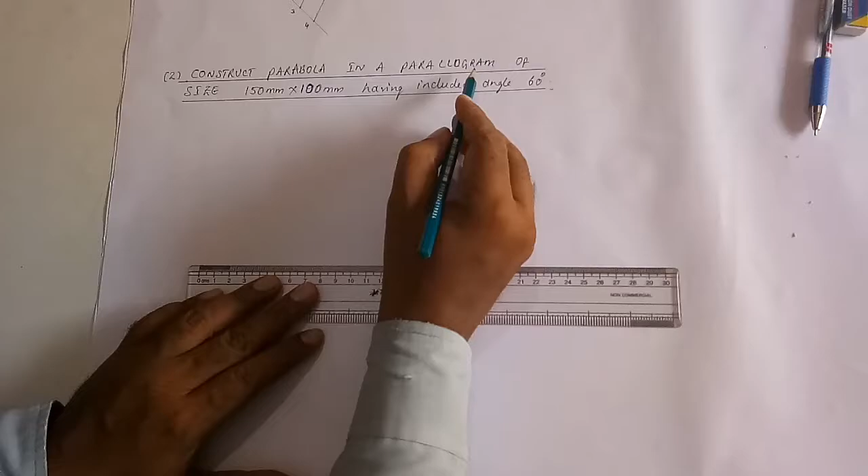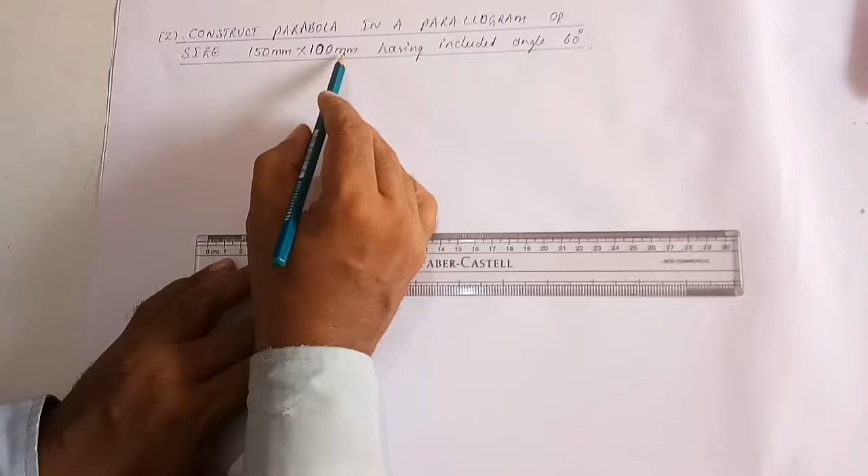First we will inscribe a parabola inside this parallelogram. Now how do you construct this parallelogram? What is the size given? 150 mm into 100 mm is the size of the parallelogram.

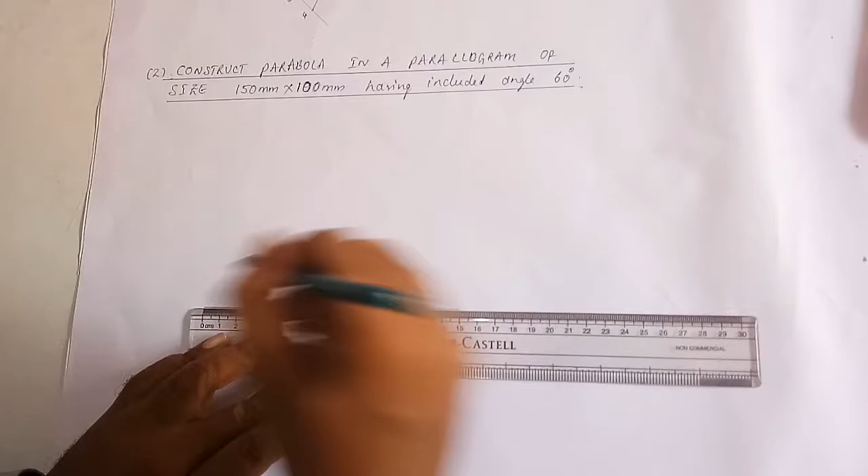First draw a line of length equal to 150 mm, that is 15 centimeters. Now how much is the included angle given? The included angle given is 60 degrees. So...

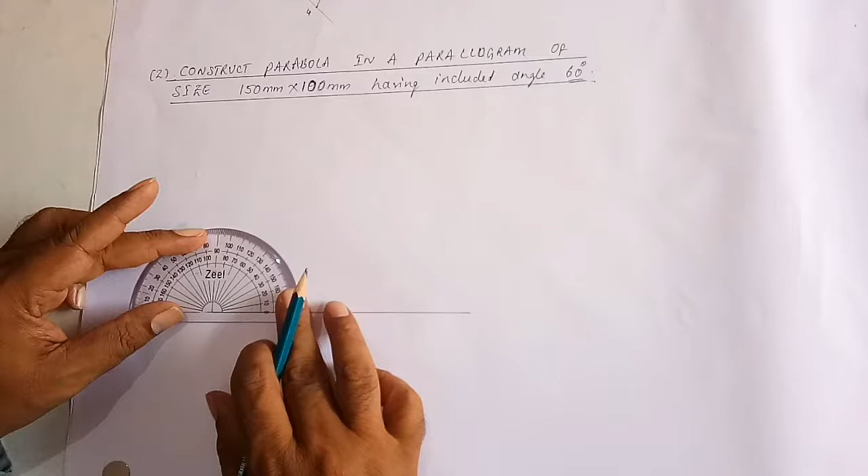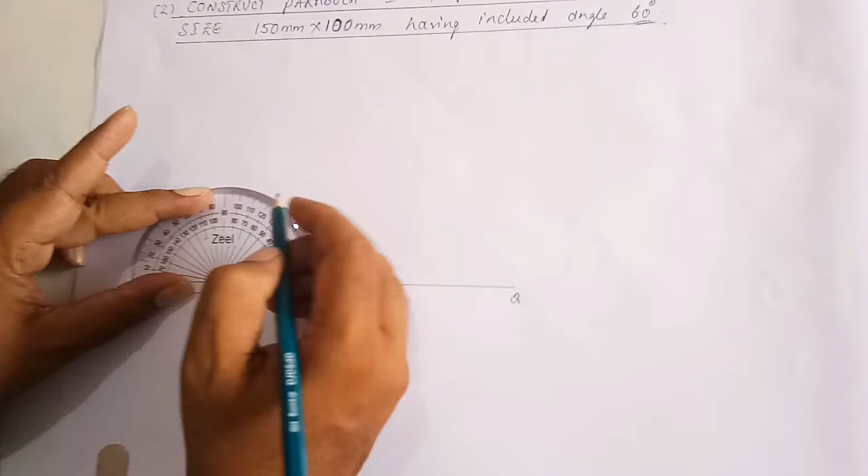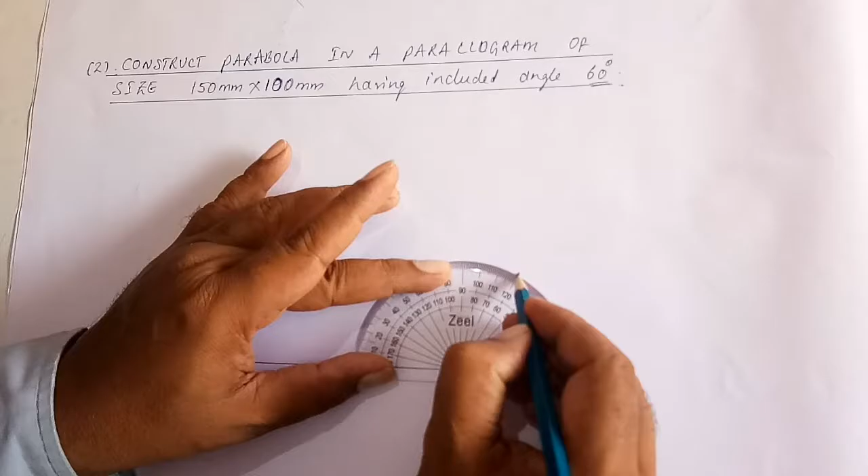Call this as PQ. At P, construct an angle of 60 degrees. Even at Q, construct an angle of 60 degrees. Your exterior angle is 60 degrees, your interior angle is 60 degrees. Now extend this line.

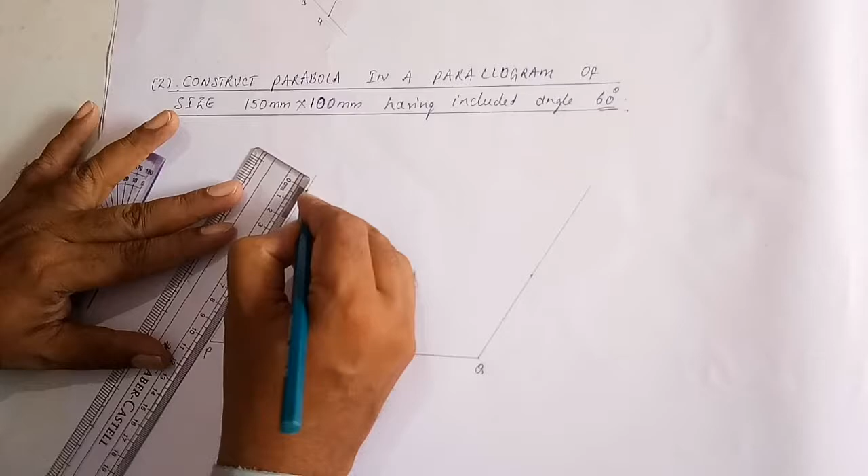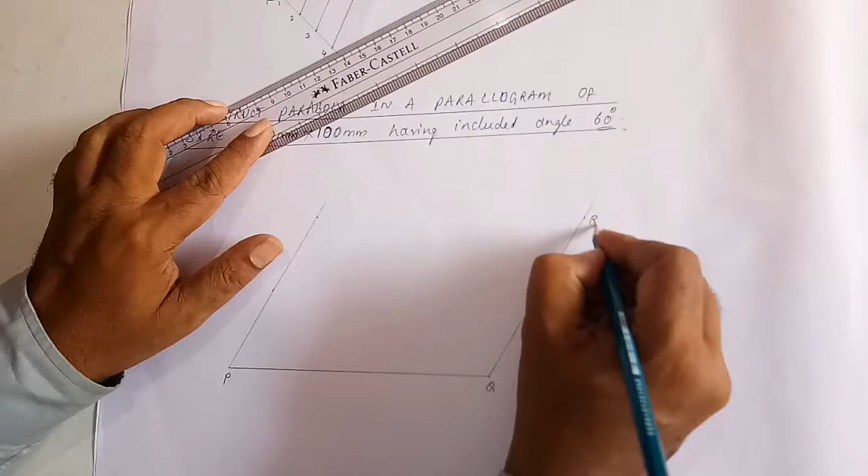Along this line, what is this other size? 100 mm. This is 150 mm, this side is 100 mm. Measure 100 mm, which is 10 centimeters. Here also measure 100 mm, which is 10 centimeters. Call this as R, call this as S.

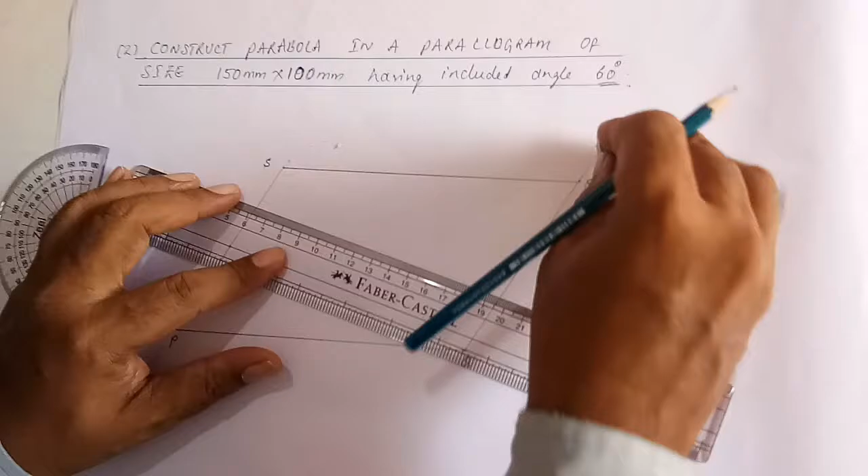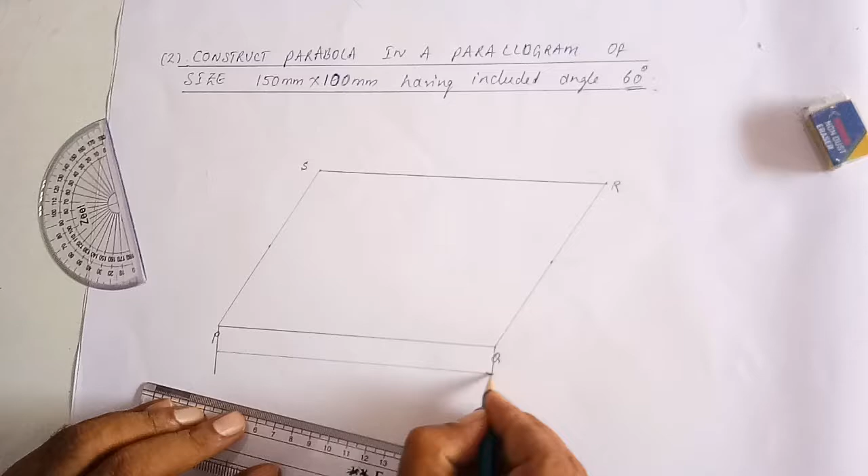Now we have a parallelogram PQRS. We have parallelogram PQRS having base 150 mm, base 150 mm, and side, the other side of the parallelogram.

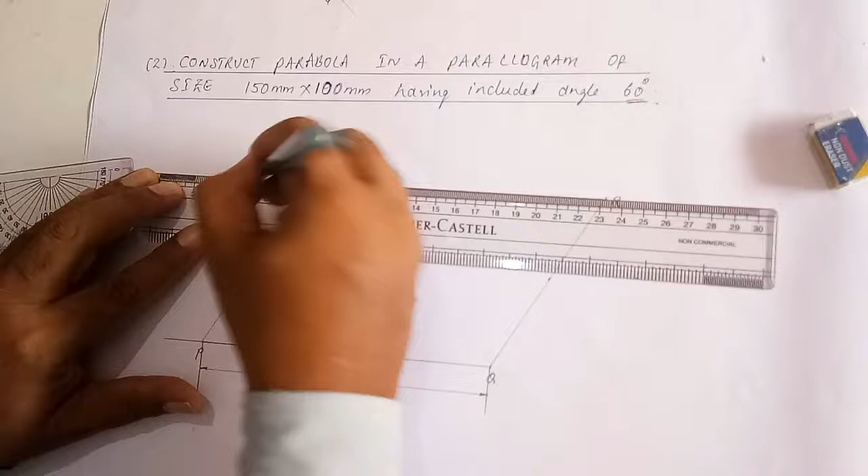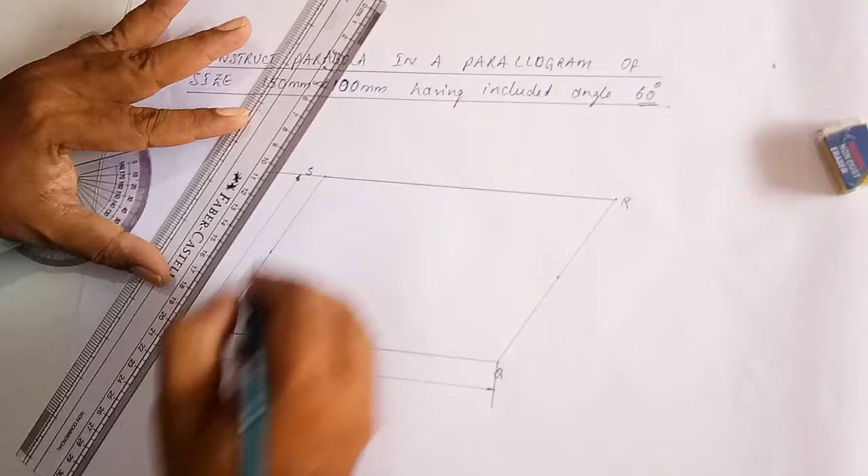You have to do the dimension like this. You have to draw the dimension line parallel to this line. This is 100 mm, this is 150 mm.

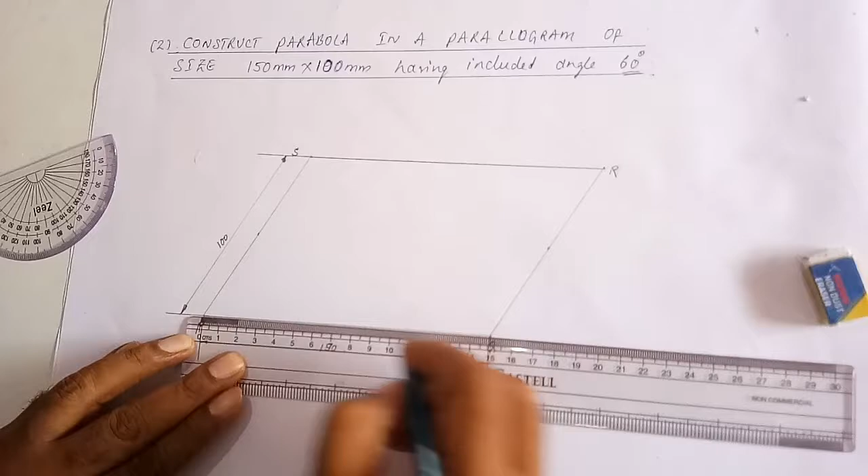Now, after completing this parallelogram, we have to inscribe a parabola inside. This is 150 mm. Divide this into two halves, 150 means 75 mm. Locate the center point at 75 mm and draw a line.

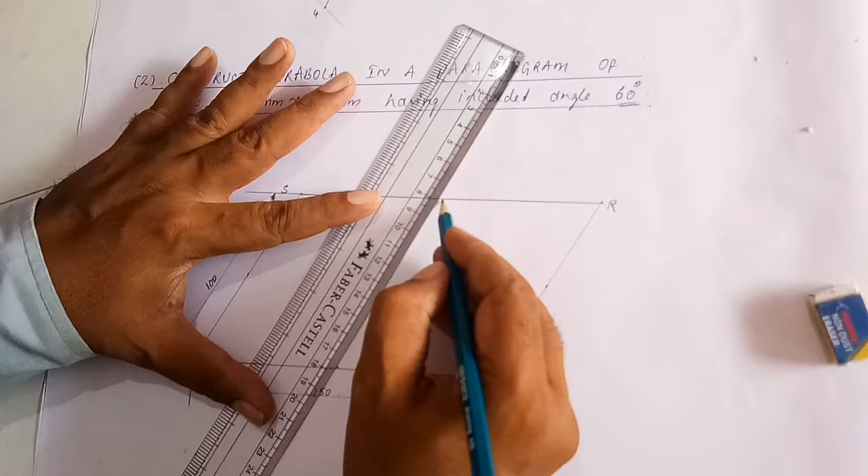Parallel to one of the sides, this is the axis of the parabola. This point we call it vertex V. This is O. OV is the axis of the parabola.

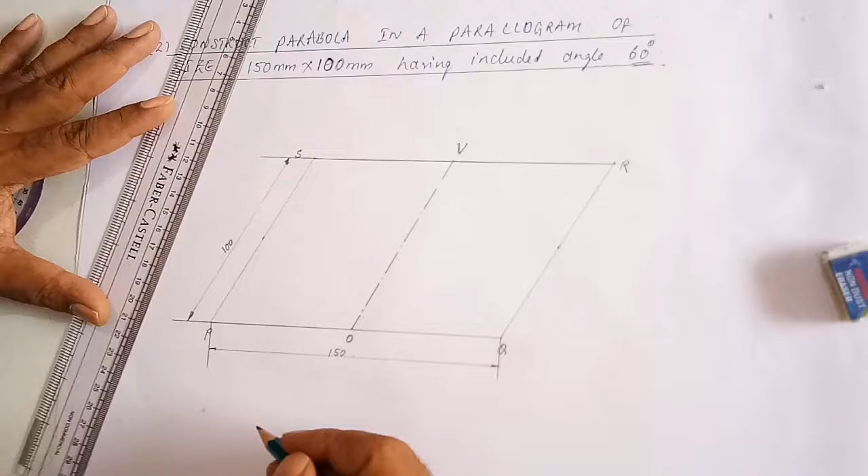Now we have parallelogram PQRS. This is a parallelogram. This is the center of this side and this is the vertex, OV center. Join this and this should be a chain line. You can see here, chain line.

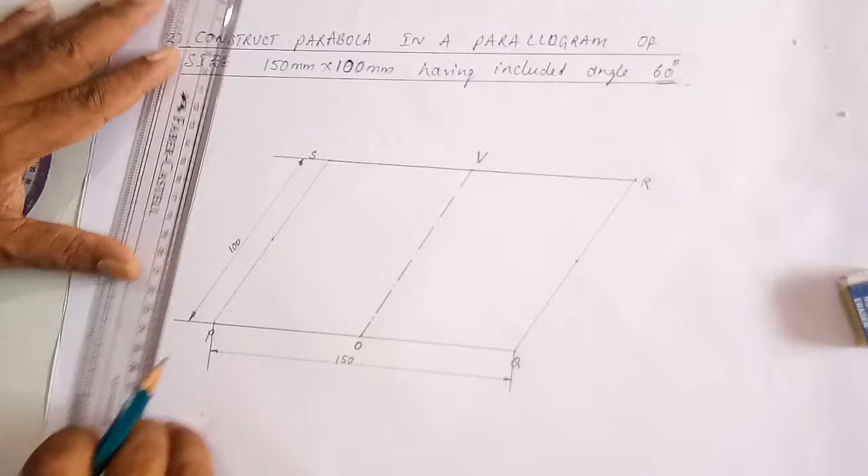After completing this, you can divide any one of the sides into 4 equal parts. Since it is 100 mm, I will adopt the normal method itself. You can do the previous method also. Yesterday what I taught, you can do that method, or else you can do this method also.

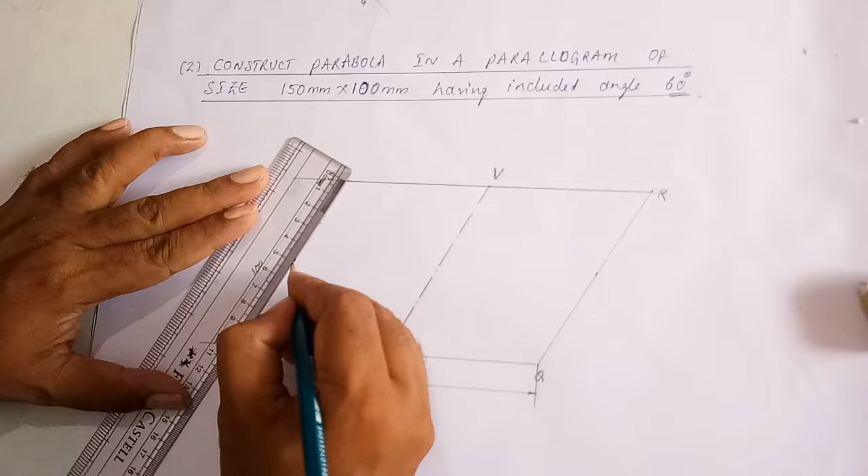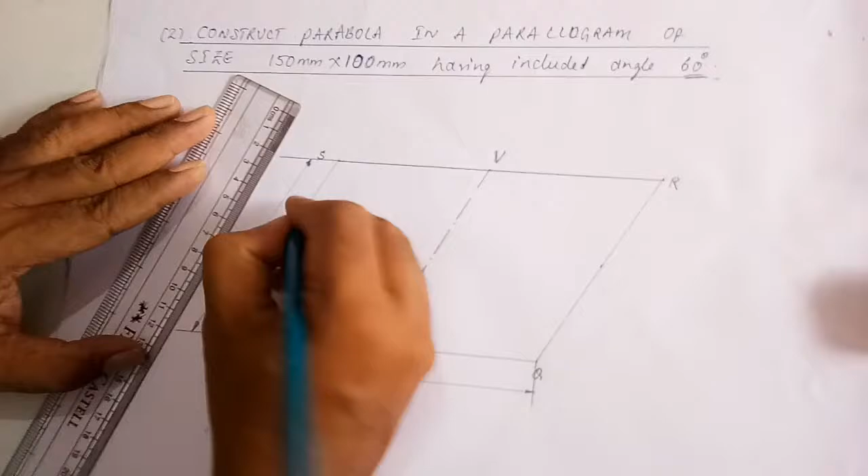4 parts, 100 mm, 4 parts means 25 mm, 25 mm you can take. 3 points like this. 4 parts are divided: 1, 2, 3, 4. Call this as 1, 2, 3. Similarly, this side also you divide into 4 parts.

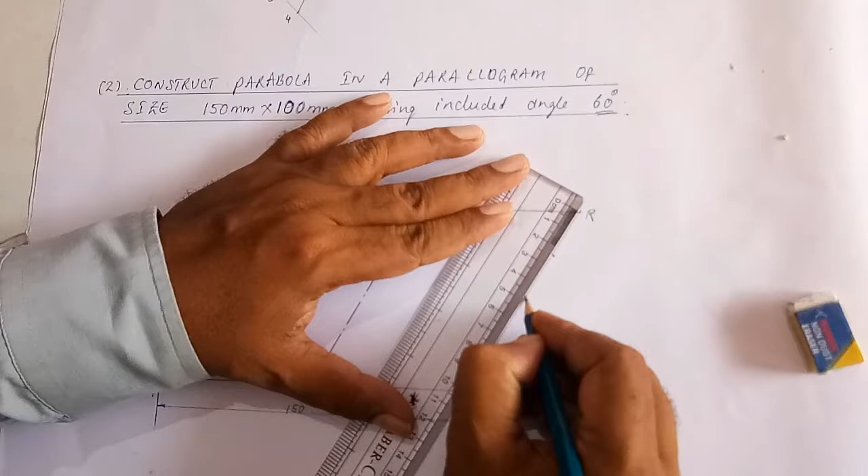How do you divide this into 4 parts? 25, 50, 75, 100. Call this also as 1, 2, 3. Now PO is 75 mm, you can't adopt the same method.

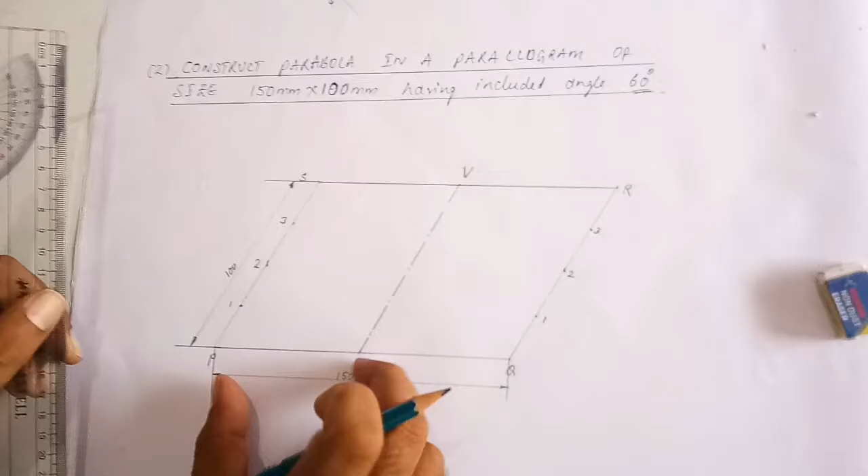Now divide this PO into 4 parts, OQ also into 4 parts. Now how to divide OP into 4 parts? Draw a line at any angle.

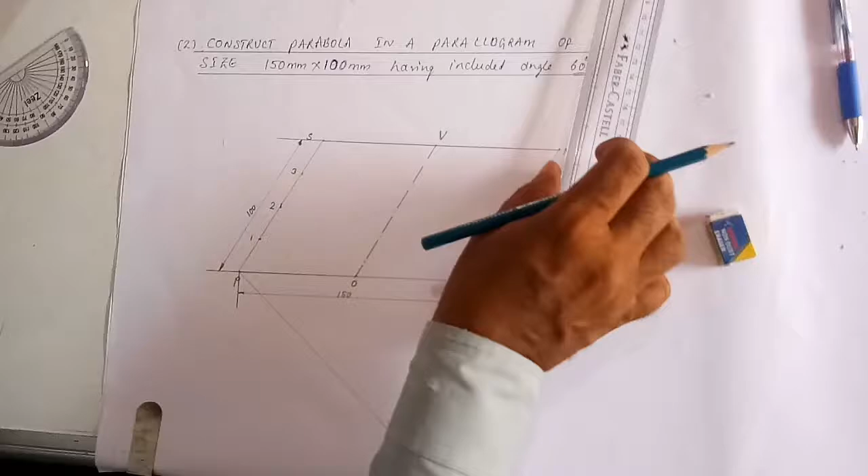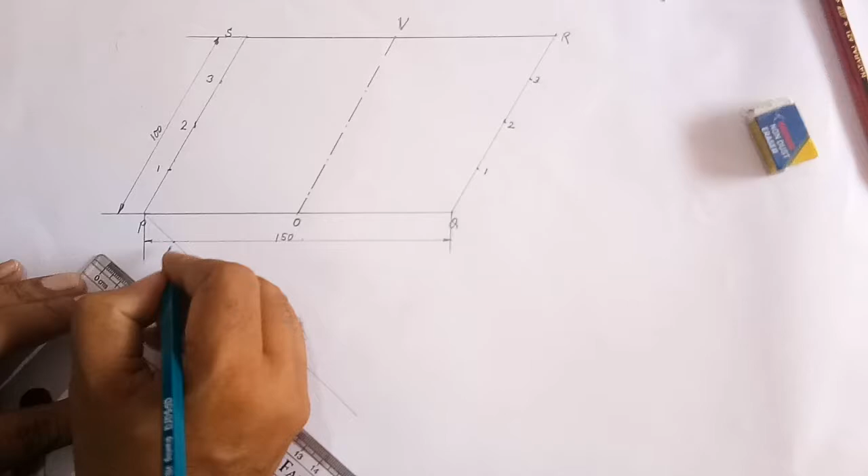And here you take 2 centimeters: 4, 6, 8. 2, 3, 4 parts have been taken. Call this as 1 dash,

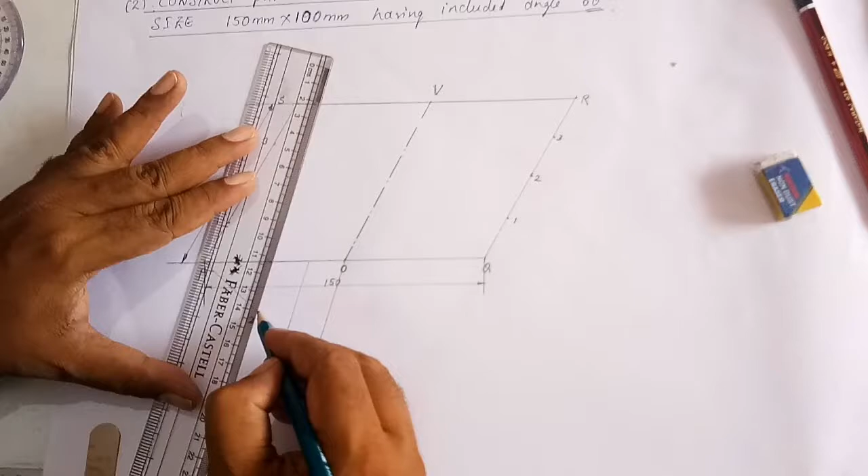2 dash, 3 dash and 4 dash. Join 4 dash O, and draw a line parallel to 4 dash O from 3, from 2 dash, from 3 dash, 2 dash, and also from 1 dash. Draw parallel lines like this and call these points as 1, 2, 3.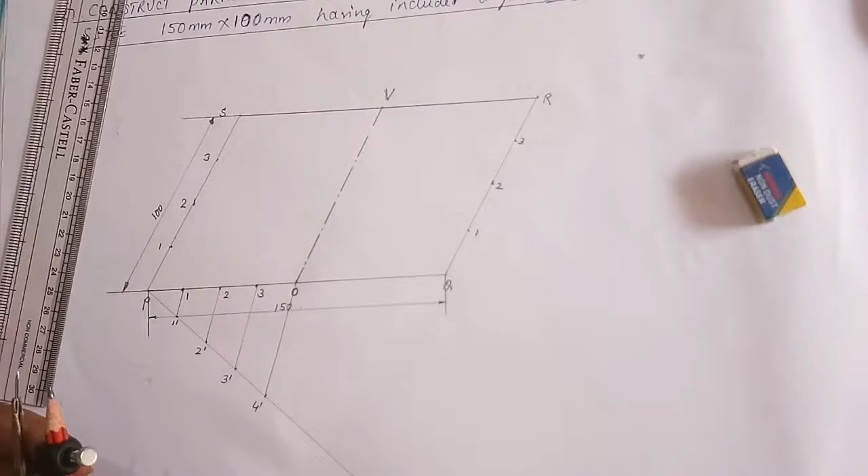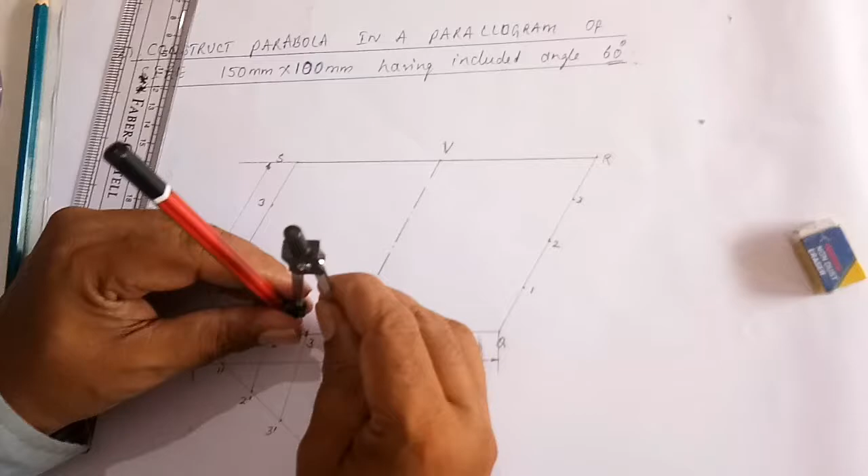Similarly, for this side, if you want to find this side, you can make use of your compass and transfer the points. Now already I have divided this into 4 parts. Same distance you can take here and then transfer those points here.

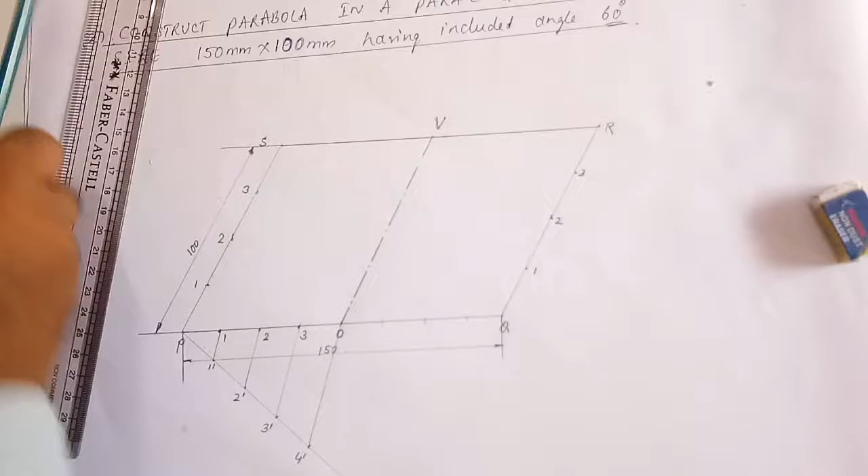4 parts, call this as 3, 2, 1. Now what I did, I have divided this side into 4 parts. I have divided this side into 4 parts, OP into 4 parts and OQ into 4 parts. Like this we have to divide this into 4 parts.

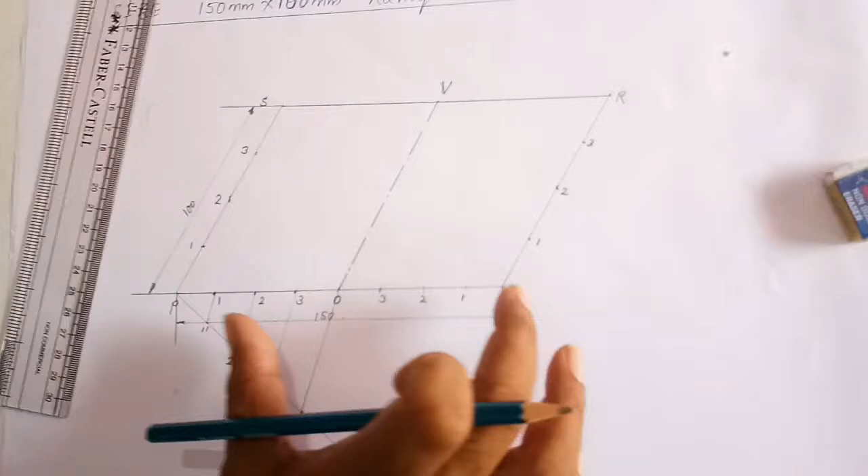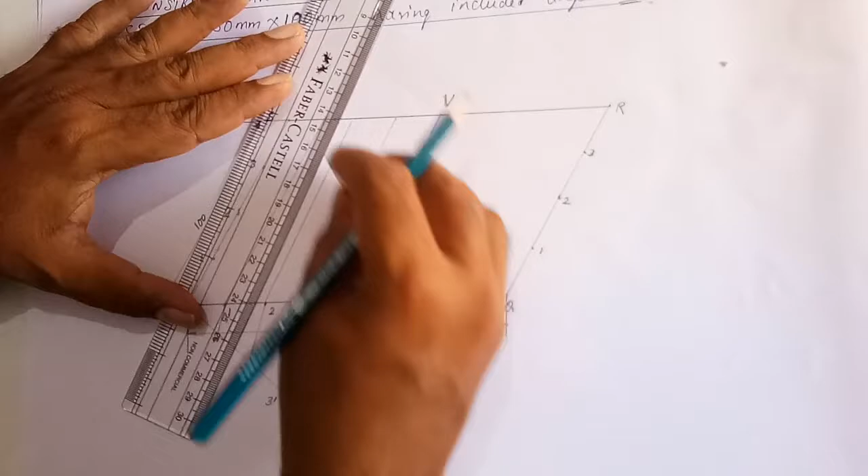Then draw a line parallel to this vertex line from 3, from 2, from 1. All these lines should be parallel to this vertex line. Like this you have to draw parallel lines. You can make use of a drafter for drawing parallel lines. Similarly, here also you can draw parallel lines.

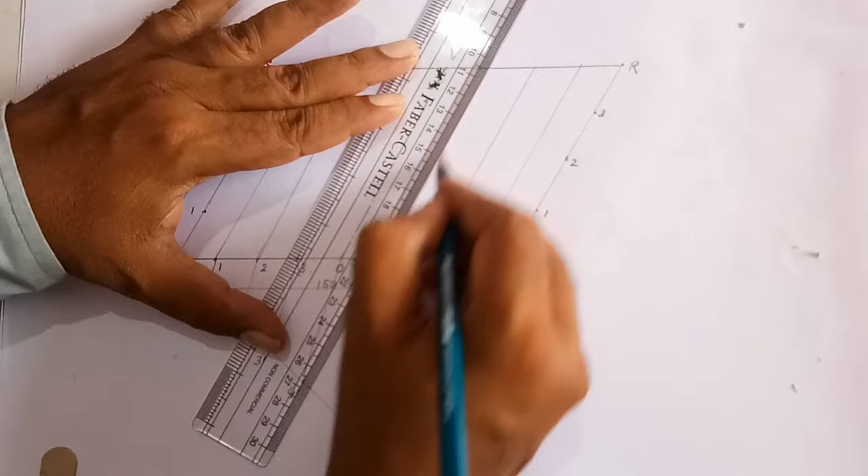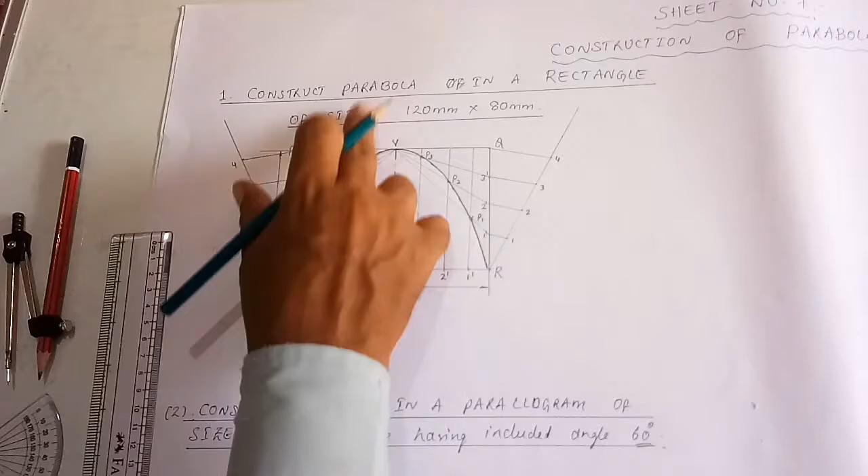So the only difference is this is the rectangular method. In the rectangular method what did we do? We drew vertical lines. In a rectangle, if you want to inscribe a parabola, we did vertical lines. Here in the case of a parallelogram, we are drawing parallel lines, like inclined lines. So for these 2 sides, we are drawing parallel lines. Understood?

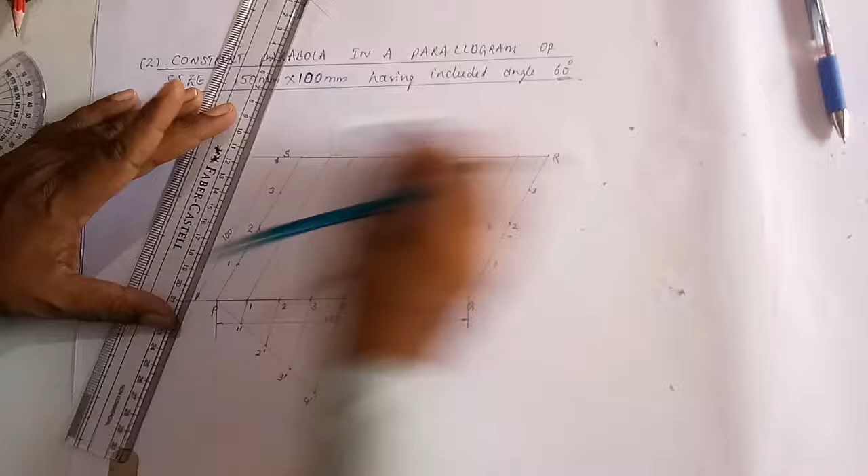So like this, you should draw the parallel lines. All these lines should be thin. Don't make this dark. Okay, all these lines should be thin.

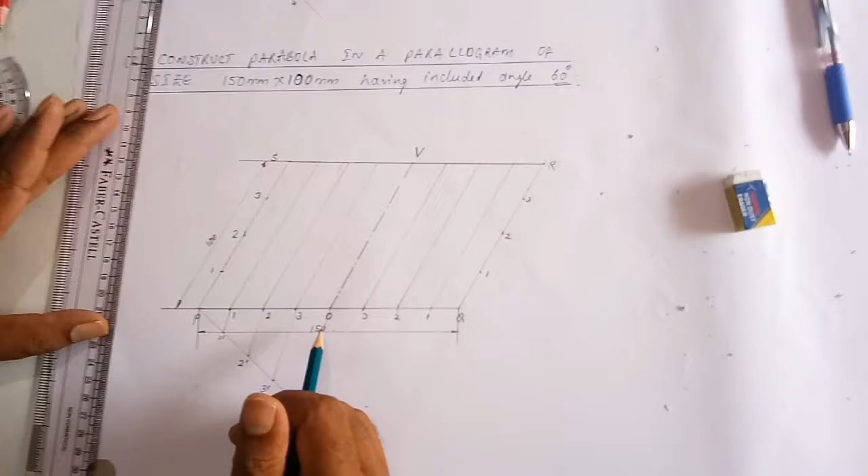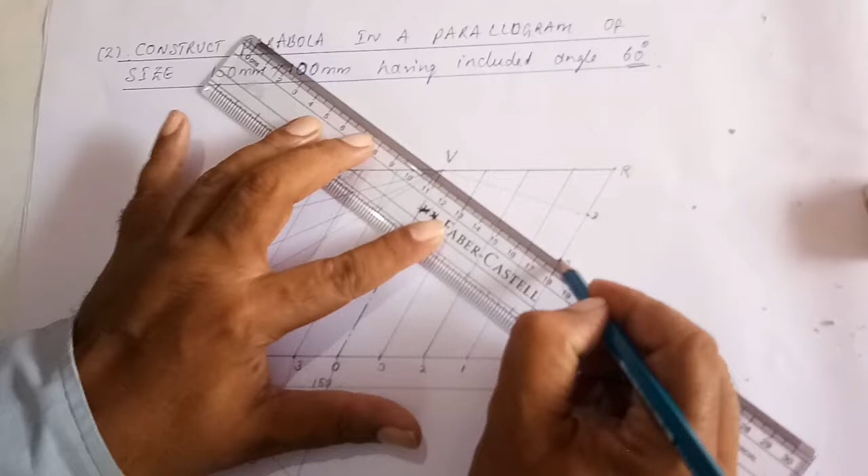Next, from V, join V1, join V2, join V3. Similarly, on this side, join V3, join V2, join V1. The previous method what you did, the same way you have to do here also.

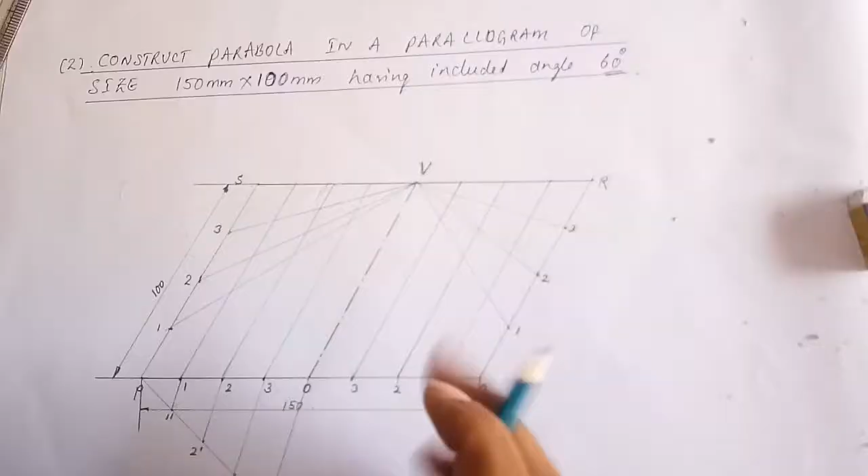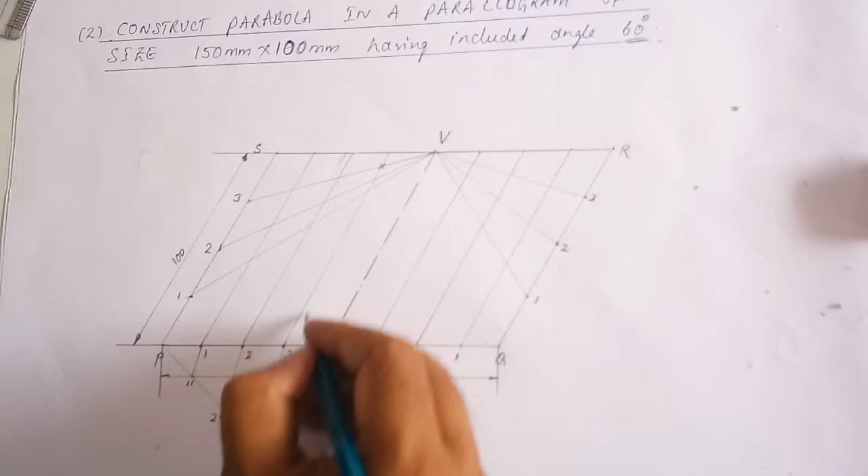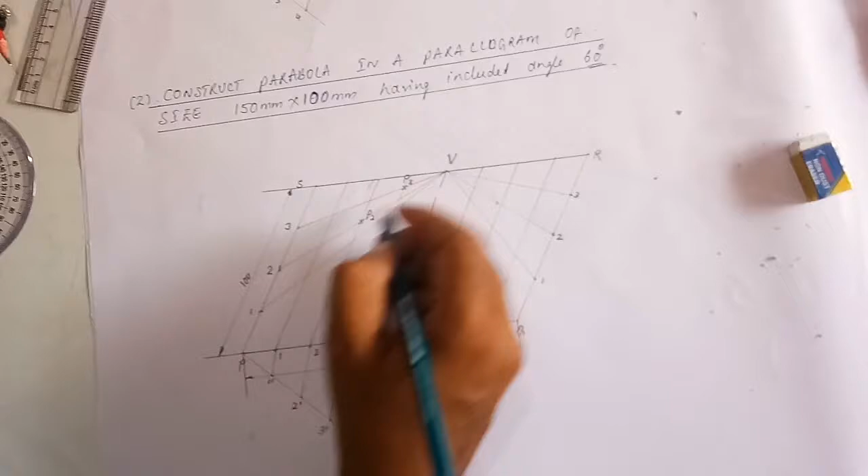Next, the V3 line and the line drawn from 3 are going to meet at one point. Both are intersecting at one point. Call this as P3. The line drawn from 2 and V2 are intersecting at one point. Call this as P2. The line drawn from 1 and V1 intersect here. Call this as P1. Similarly, on this side.

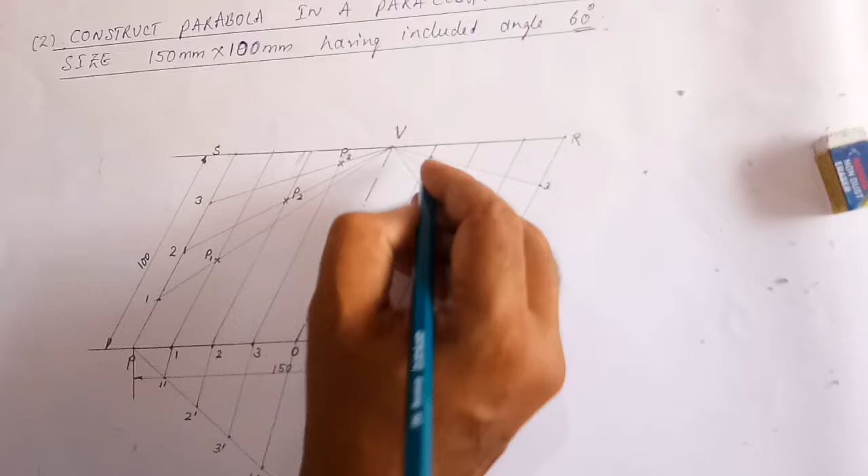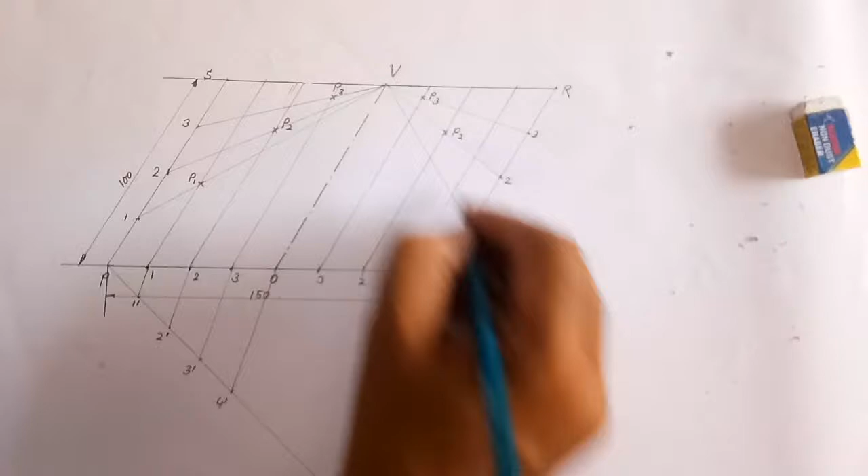The line drawn from 3 and V3 are intersecting here. Call this as P3. The line drawn from 2 and V2 are intersecting here. Call this as P2. The line drawn from 1 and V1 are intersecting here. Call this as P1. Locate the points like this first.

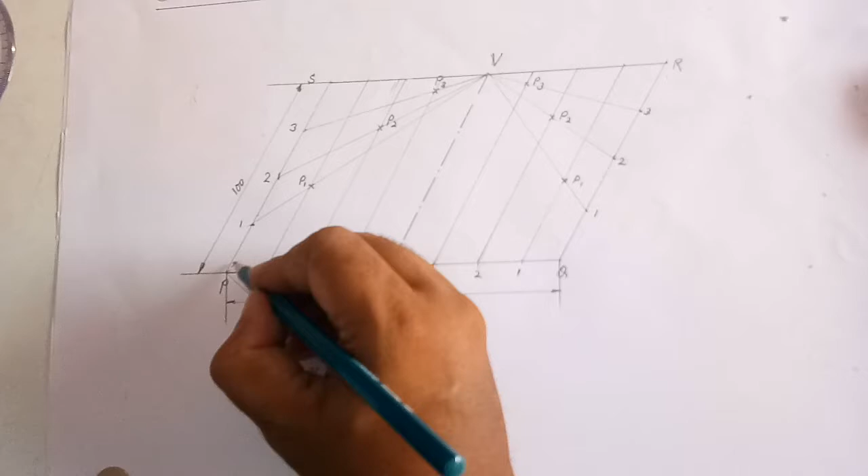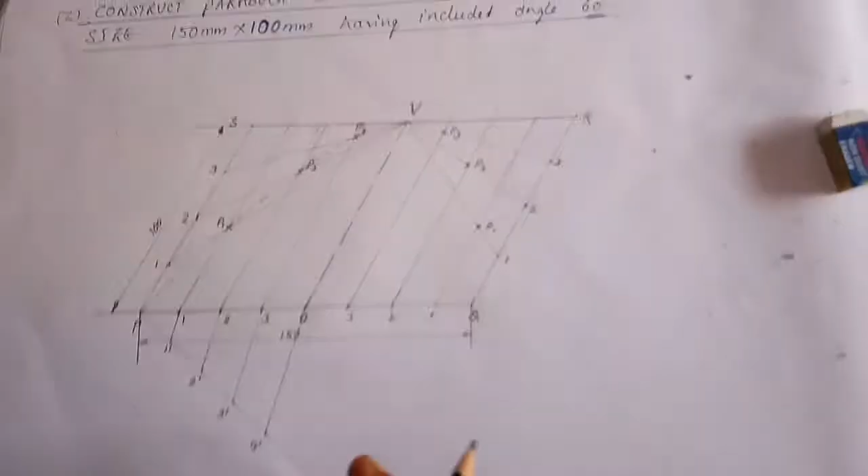After locating these points, you have to join all the points by means of a smooth curve. How do you join this? Join P, P1, P2, P3 and vertex V.

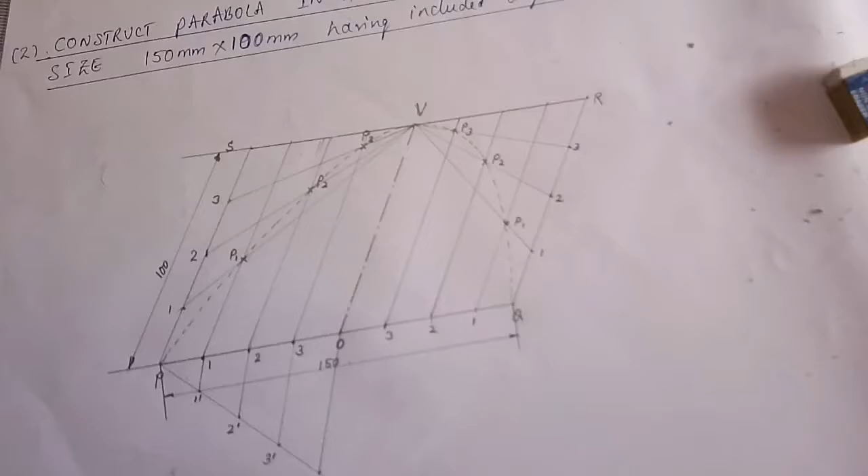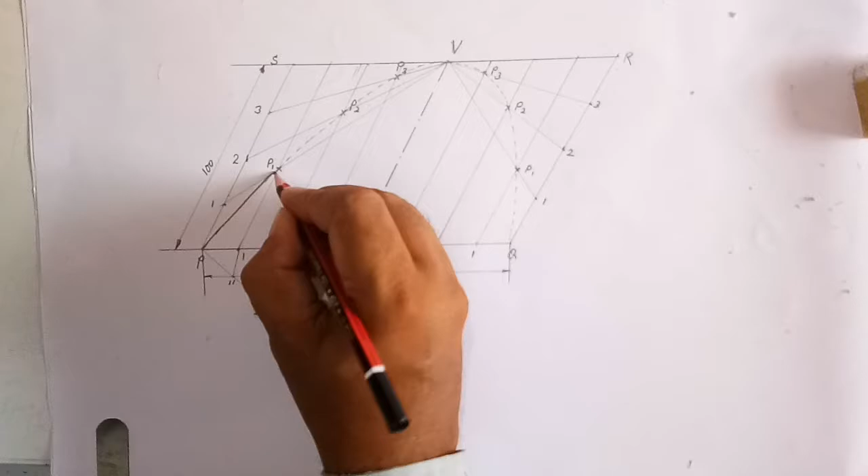Similarly, from V, join V, P3, P2, P1 and Q. Now what we did, we drew all these lines and joined them by a dotted line. Now I am going to dark this, all the lines I am going to darken. Darken this like this. All dotted lines, you join it by means of a curve.

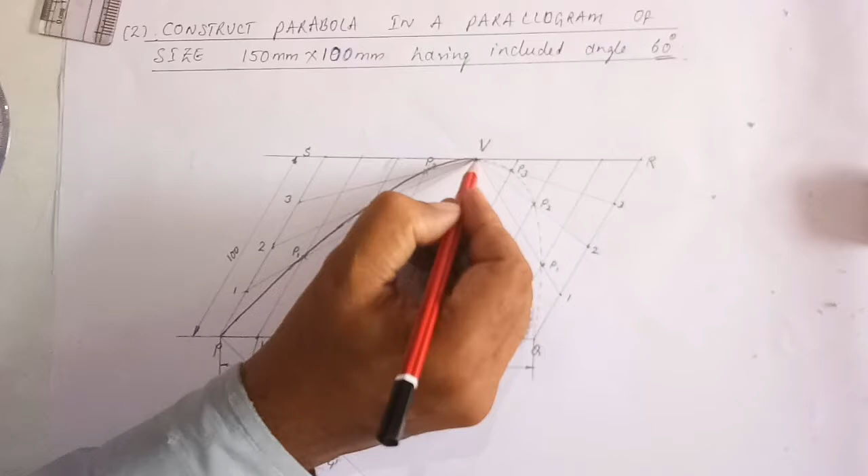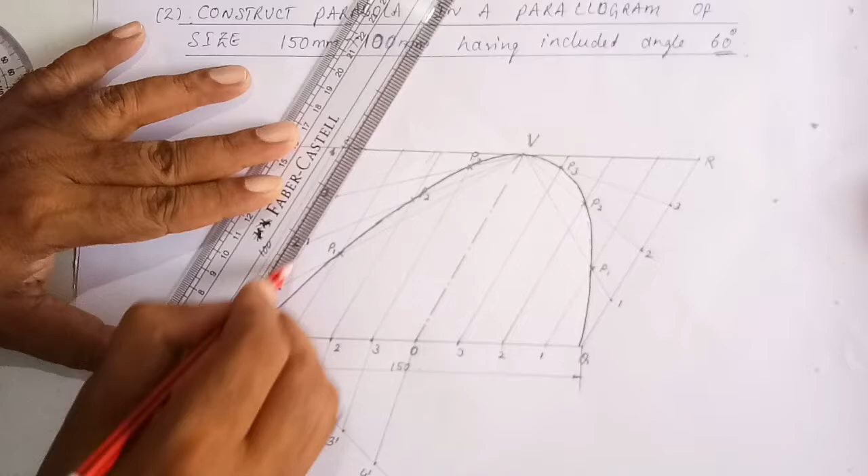This is how we inscribe a parabola in a parallelogram. Students, please note that only the parallelogram should be dark, your parallelogram and parabola. This parallelogram and this parabola should be dark. All other lines are construction lines.

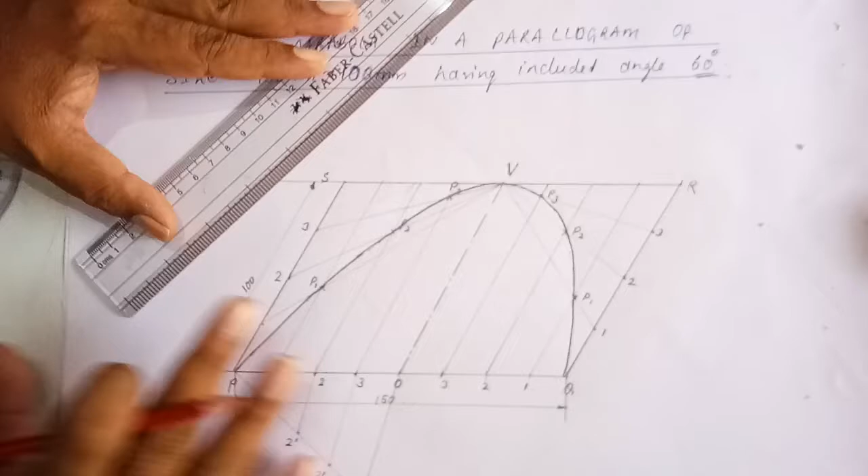All other lines are construction lines. All these lines should be thin. Don't make these construction lines dark. All construction lines should be thin. Only the parallelogram and parabola should be dark.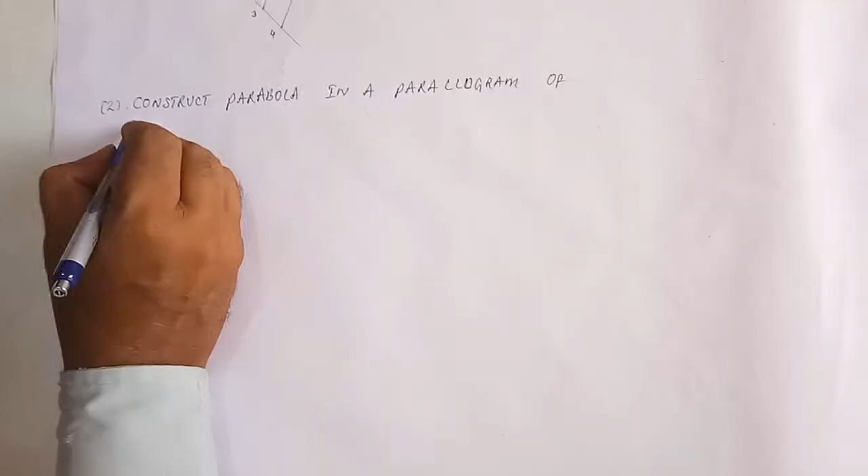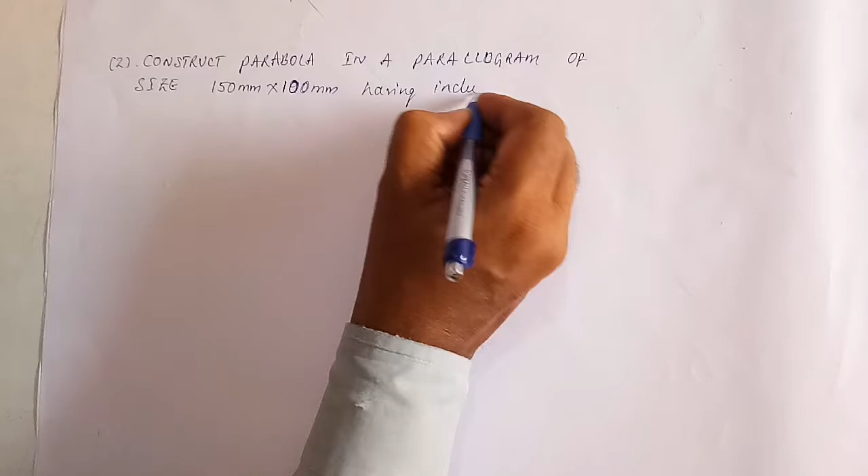Construct a parabola in a parallelogram of size 150 mm into 90 mm. Okay, 150 mm into 100 mm. Let us make it 100 mm. 150 mm into 100 mm, having an included angle of 60 degrees. Now what is the problem here?

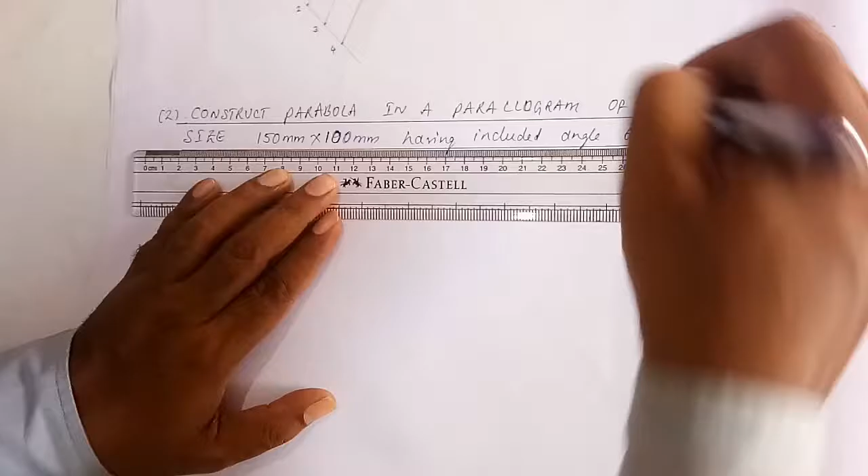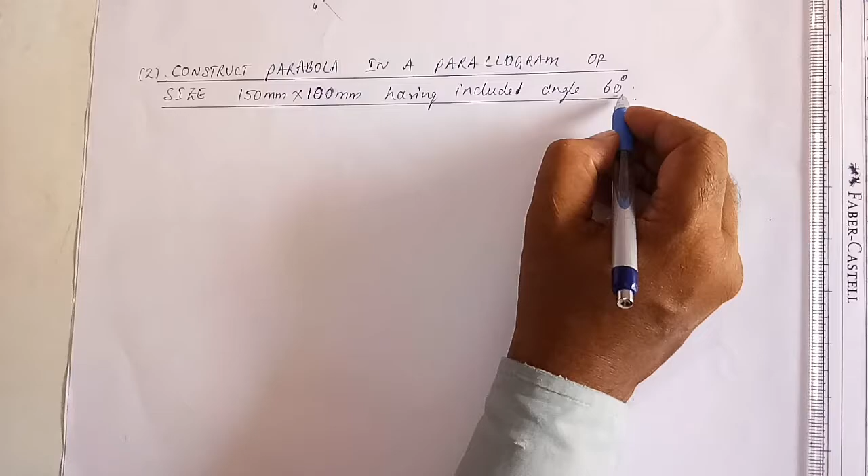Construct a parabola in a parallelogram. You will be given a parallelogram, so in that parallelogram you have to inscribe this parabola. What is the size of the parallelogram? 150 mm into 100 mm is the size of the parallelogram. And what is the included angle of the parallelogram? 60 degrees is the included angle of the parallelogram.

Now how do you construct this parallelogram first? First we have to construct the parallelogram and then we have to inscribe the parabola in it. First let us construct the parabola - sorry, first.